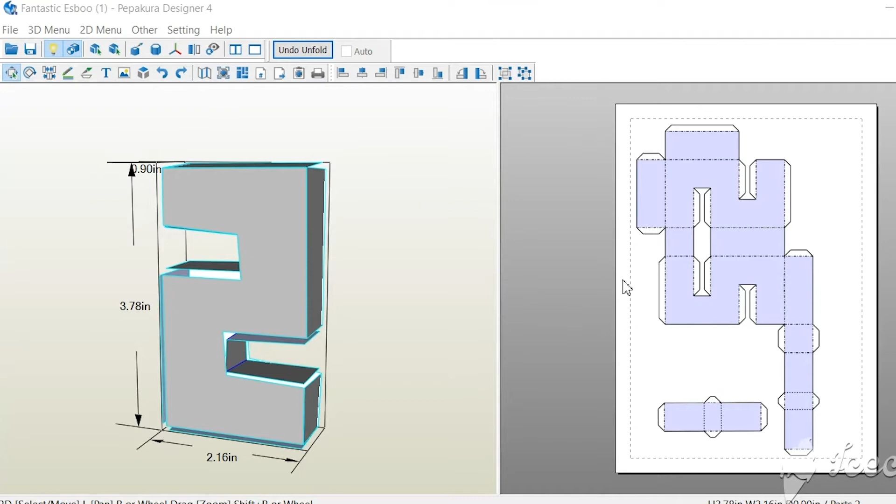one on screen. Of course, the unfolded cutout for the 3D model here is just a sneak peek for what we're about to see. One cool feature in Pepakura is that we're also able to view a 3D animation of the folding and unfolding of the 3D model cutout.

Now, let's drag the model we created to our workspace. You'll be prompted to select some options for setting coordinates and flipping faces, so you may go ahead with the default setting. You'll also find a window for dimensional scaling. This is very important to change to make sure Pepakura reads your model dimensions correctly.

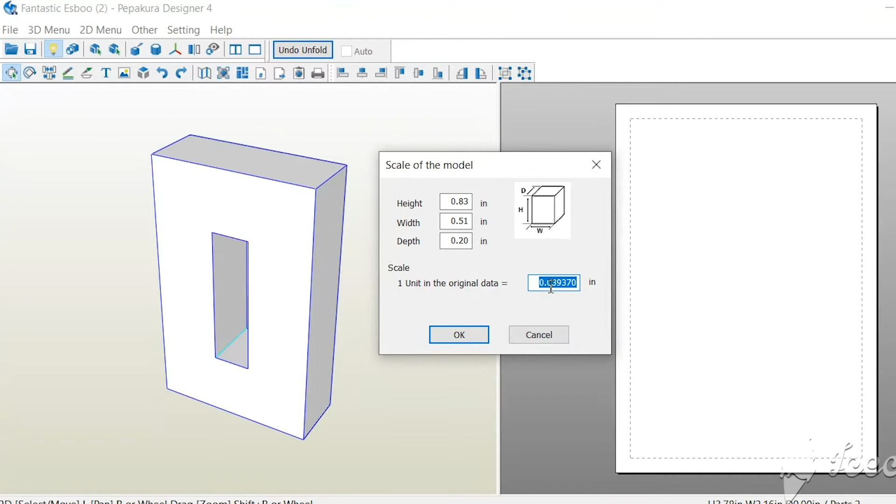Pepakura by default works with inches. If your model was created in dimensions other than inches, set the one original unit equal to the conversion between your units and inches. If you worked in inches, set it to 1. Next, we'll set our paper workspace to be equal to our printer paper size. This can be letter or A4 according to the printer you're using.

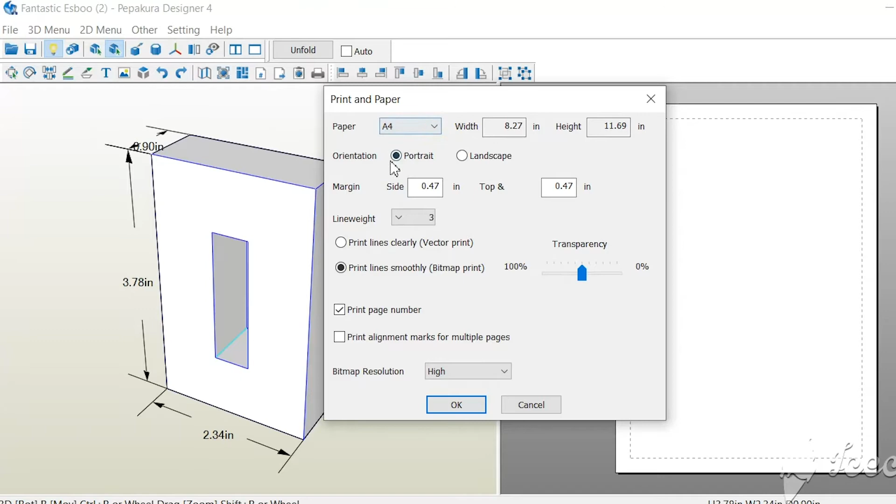Let's now unfold our model. Make sure you select Manual and set values as default, if you don't want Pepakura to rescale your model and fit it into one page. Notice how when we did that, one flap is placed in a page on its own. Drag it to the first page and rotate it so it fits in snugly.

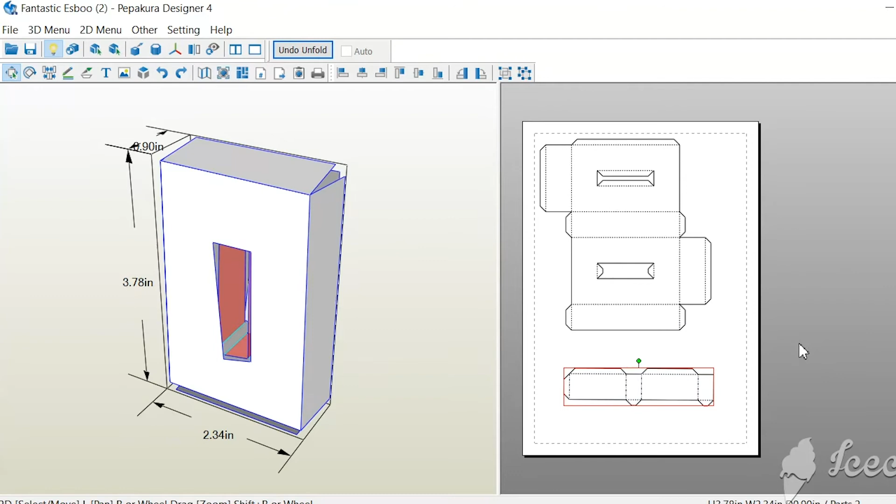The dotted lines that appear are the folding lines, the lines that you need to fold the model according to. The solid lines are the cutout lines, the lines you'll need to cut along. To view the folding animation, go to 3D menu, Folding, Unfolding Animation.

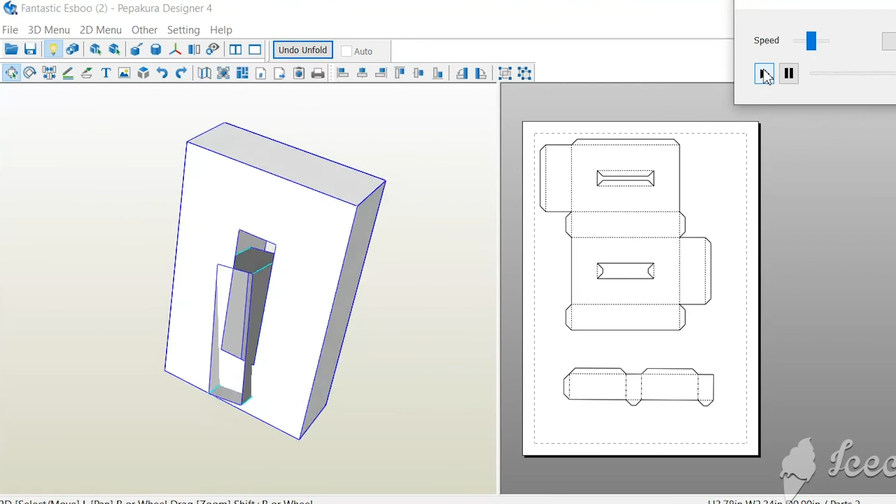Finally, we'll export our paper cutout to PDF format for printing. Go to File, Print to PDF, and save. Happy cutting and happy 2021!